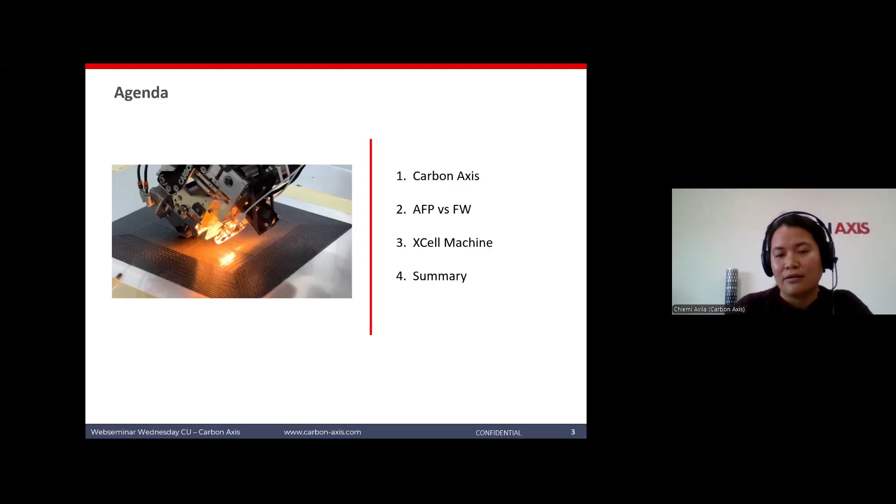So starting with the first section, who we are. Carbon Axis was founded in 2018 in La Rochelle, France. We are located on the west coast side of France. It's a very, very nice town in France, next to the sea.

It was founded by Pavel Perrotet and me. So we specialize in automating composite processes. The vision from the start for Carbon Axis since the beginning has been to make composite parts more affordable, more repeatable, and generate less waste through simpler and more efficient automated solutions.

So at Carbon Axis, we provide both hardware and software turnkey solutions that are ready for production. They're intuitive, easy to use, easy to maintain, and at the same time, they're affordable and robust.

So our machines are fully developed and assembled in-house in La Rochelle. We are mainly machine suppliers, so we supply machines to different customers in different industries.

We have material suppliers using our machines. We have machines in the aerospace industry, in different general industries, and also in universities.

And we also provide R&D services. So we have in-house facilities, two machines at our facilities that can be used to do R&D testing. We can do material validation, simulations, and prototyping.

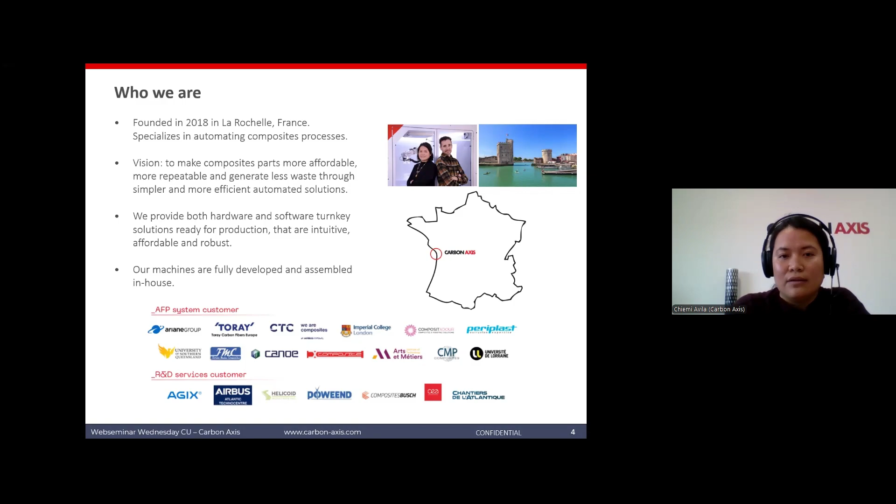And then we have customers that want to go sometimes into small series production. For that, some of our customers have now become partners as well, having our machines to be able to do serial production if necessary. So that's who we are at Carbon Axis.

Now we're going to go into the second section, the difference between fiber placement and filament winding, and how we can work with both of these processes together.

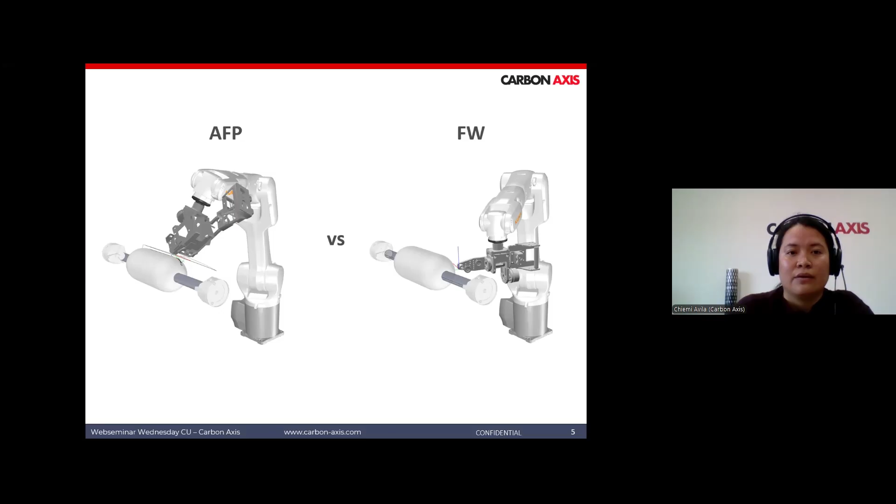As an introduction, I'm just going to introduce the term for tape winding. Tape winding is the process of using an automated fiber placement head, like we can see in the video, with an external axis, which in this case can be horizontal or vertical.

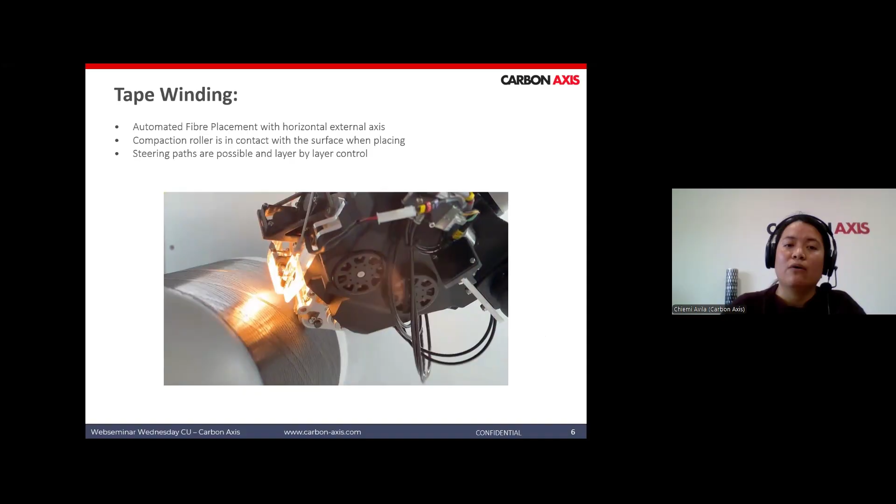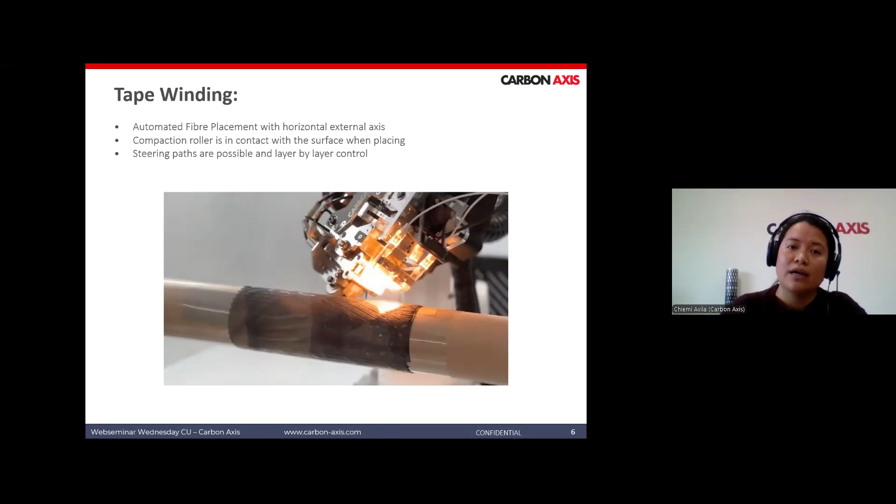The main difference when comparing fiber placement with filament winding is that with fiber placement, we are always in contact with the surface when placing. The fiber being placed has some pressure applied by a compaction roller. In filament winding, you are not in contact directly with the surface when placing, since you're placing onto a rotating mandrel under tension.

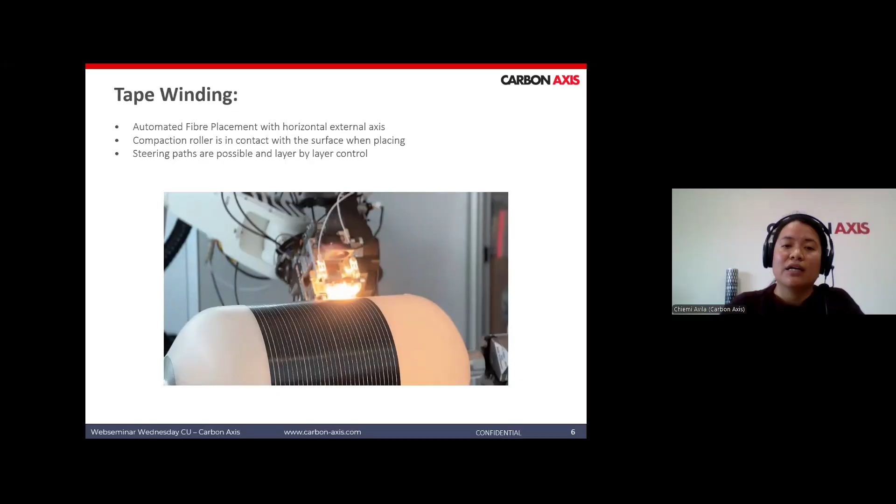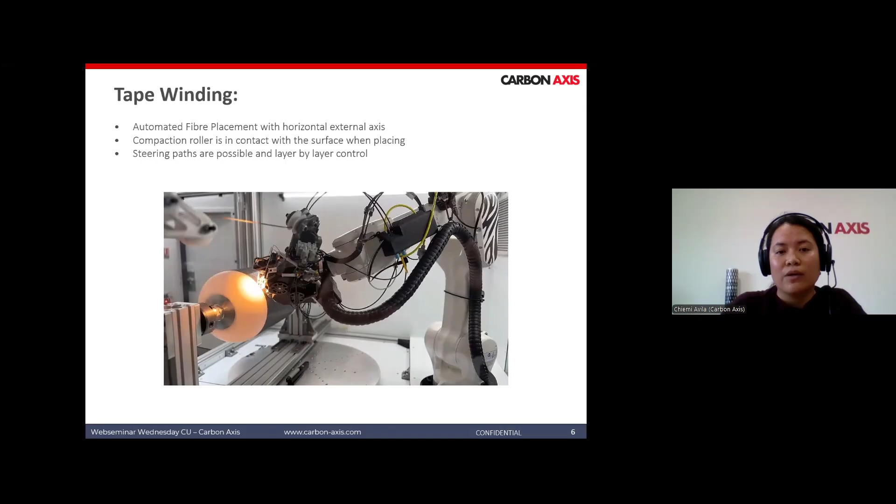The advantage of being in contact with the surface, as with tape winding, is that we have more control over what we're placing. We have more precision on the tow being placed, giving us layer by layer control.

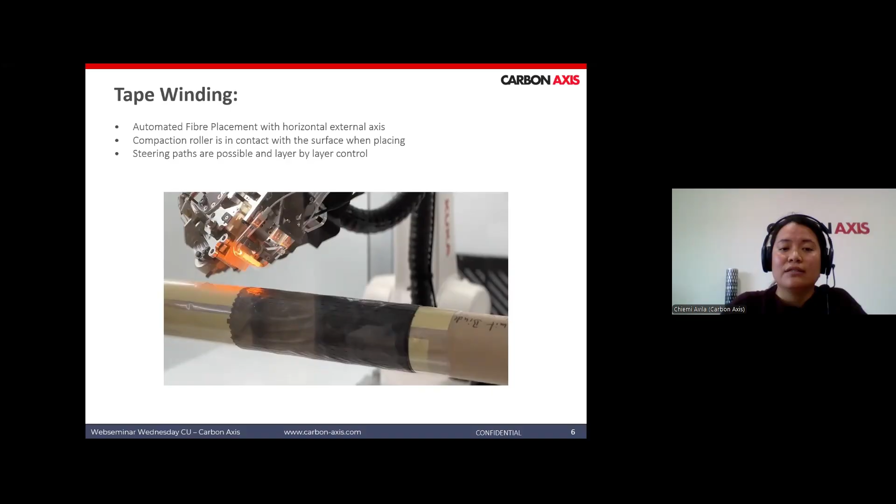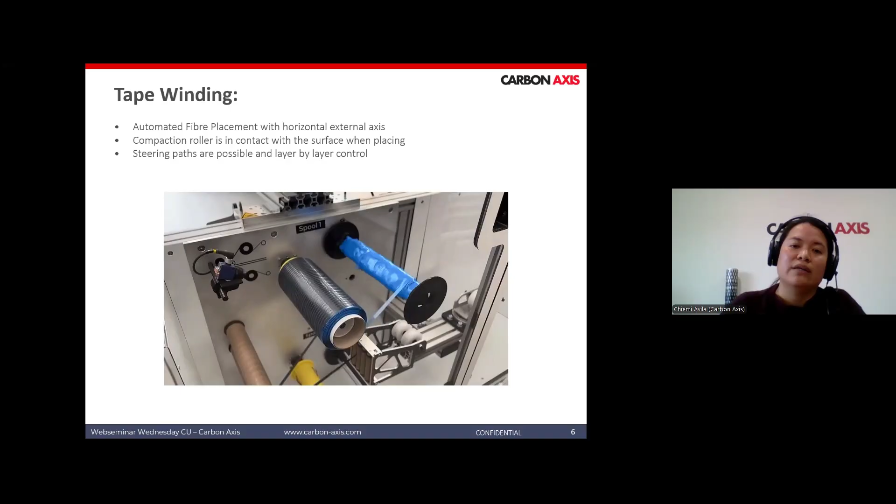Another advantage is that we can use steering paths, so we can have paths that follow the load, allowing you to optimize your layout better. So one of the advantages of tape winding is more precise control whenever we're placing the fiber, in comparison to filament winding.

Another difference between tape winding and filament winding is the fiber angle. In tape winding, we're able to place any angle that's available—we can place pure zeros, as you can see in the picture, or pure 90s.

In comparison, filament winding has a challenge achieving angles lower than 15 degrees, like angles parallel to the axis. These shallow angles are very hard to place with filament winding. In tape winding, you're able to place any angle, though there are restrictions depending on the head—you might have some collisions with the mandrel—but in general, any fiber angle can be placed with tape winding.

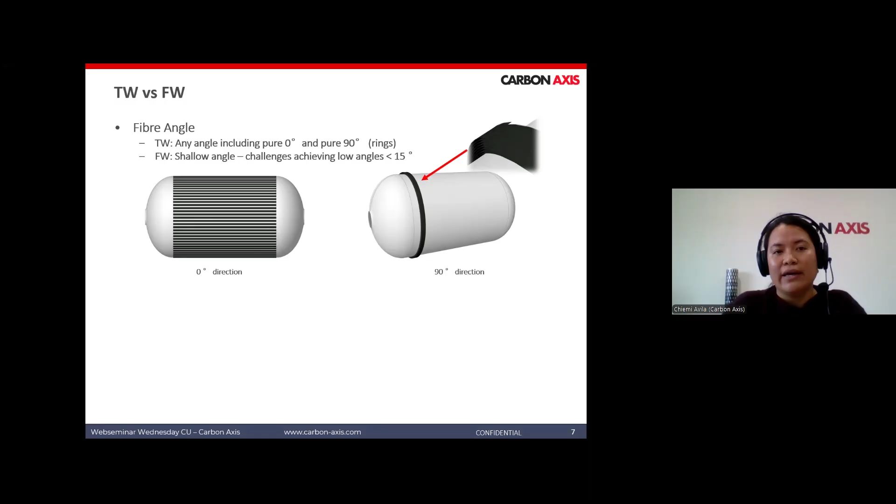The main advantage of tape winding is the idea of using local reinforcement. This isn't possible in filament winding because you're continuously placing fiber, but in tape winding, we are placing and cutting each fiber, which makes it possible to place material locally.

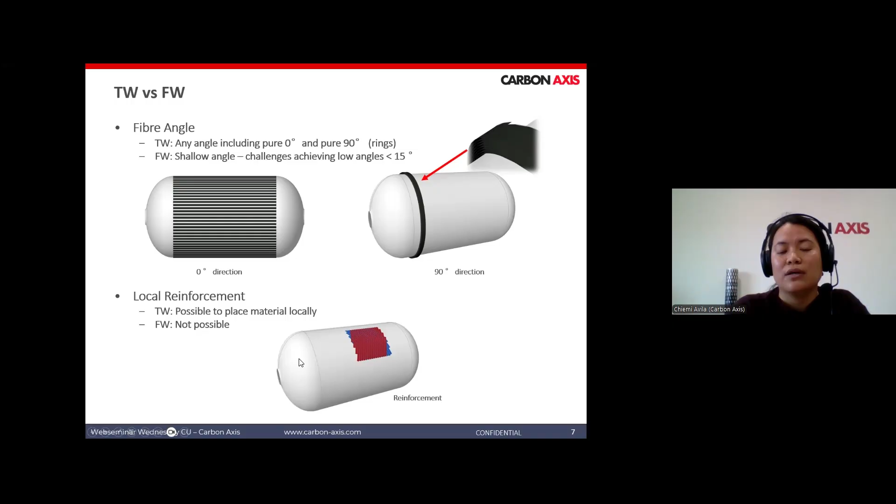In this case, we just did examples, like for example a patch to reinforce maybe some inserts. You can also reinforce some domes. The whole idea is that you can only place material where it is necessary.

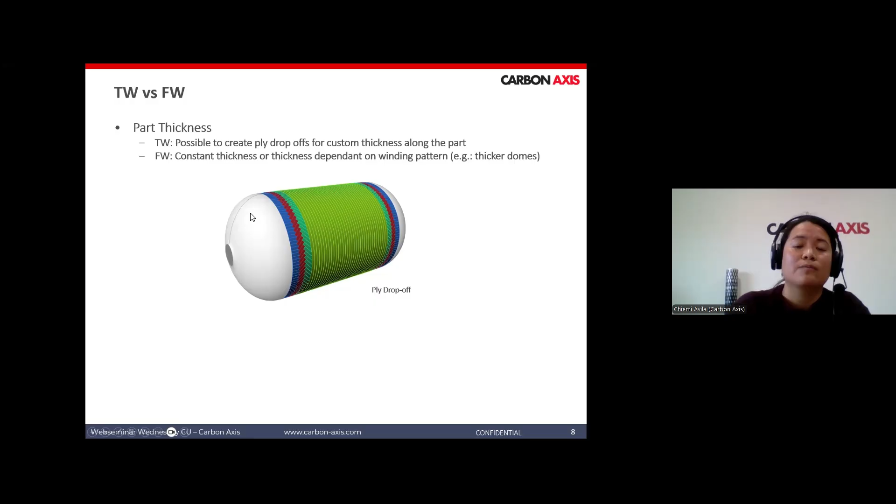Like that, in tape winding, you are able to have custom thickness. This is something not possible in filament winding, where you have constant thickness that's also dependent on the winding pattern you have. For example, in pressure vessels, you usually have very thick domes because of the turnover regions where the fiber keeps building up.

But in tape winding, you're able to create your own ply thickness. You have reduced part thickness, so you can also use less material, and you're able to create, for example, ply drop-offs. Like in this example, we have four different layers, as you can see here, and like that, we're able to select material just where it's necessary.

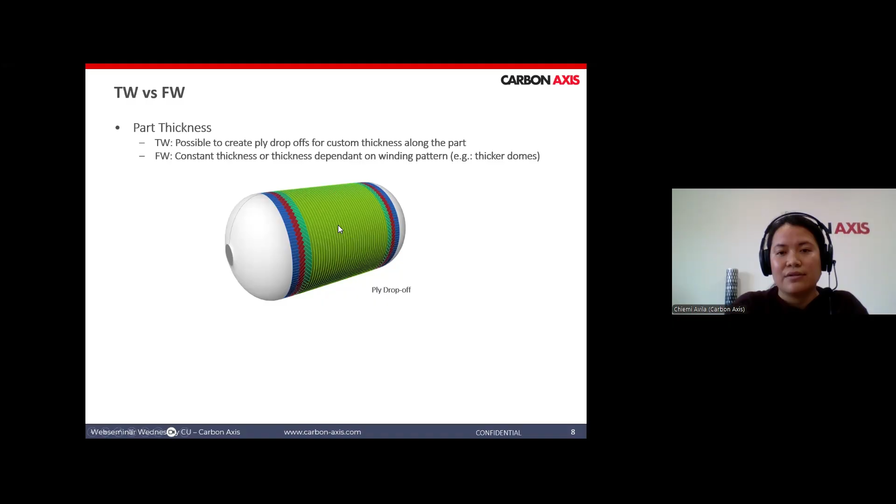Because we're able to place locally, we have lower material waste with fiber placement. This is because we don't have the turnover zones at the extremities. For example, in filament winding, when winding a pipe, you have very long turnover zones if you want to wind shallow angles at the extremities. So the advantage of tape winding is that you can reduce the thickness and also reduce the material you're going to use.

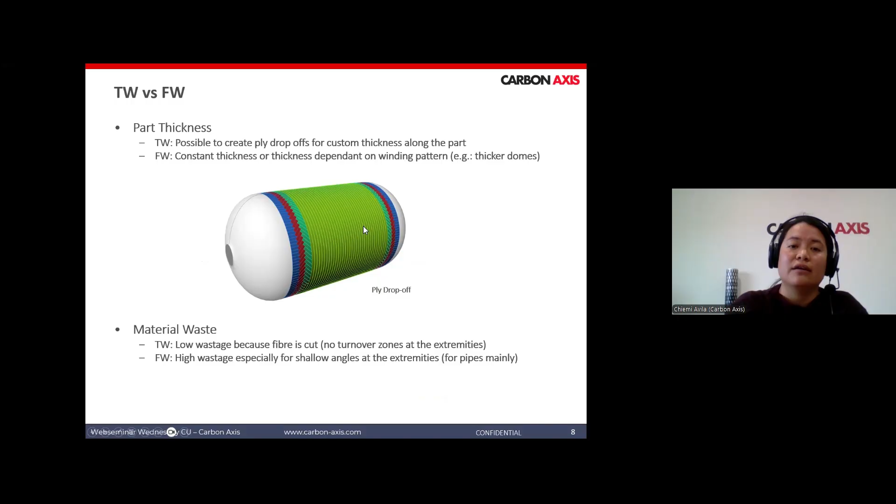As we saw in this picture, we're placing each layer as a unidirectional layer. That affects the part quality that we get from using tape winding. In tape winding, the part quality is higher because we don't have the crimp between the layers that is formed like when we're using filament winding.

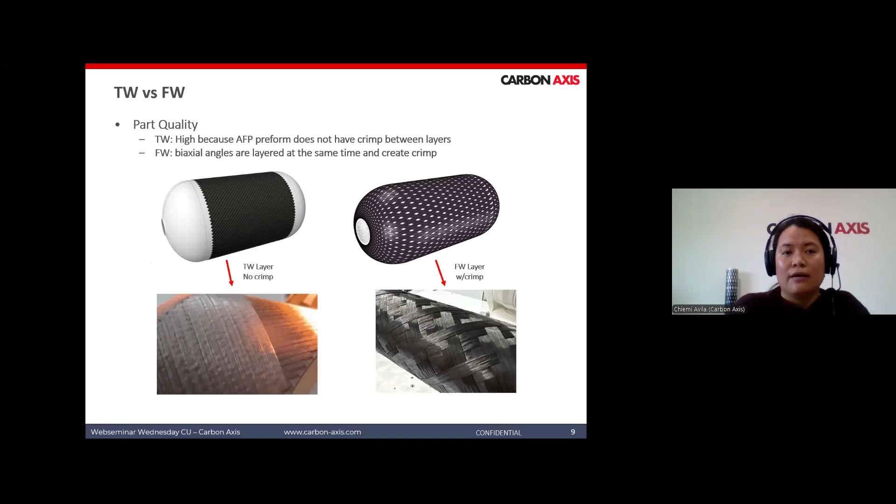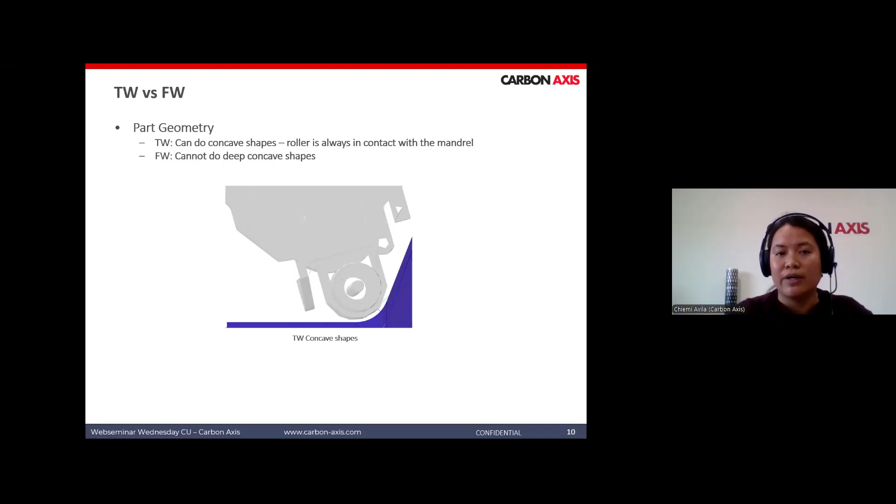So the part quality in tape winding is better. Another advantage we have when using tape winding is the part geometry that we can place. We are able to place more complex parts, we can do concave shapes, for example. As our roller is always in contact with the mandrel, we're able to place directly on the surface and do not have the fiber bridging that we will have with filament winding. So in tape winding, we can do more complex parts, concave shapes, double curvatures, non-symmetrical parts that you cannot do with filament winding.

However, one of the main disadvantages that we have with tape winding is the deposition rate. It's a much slower process compared to filament winding. So it's not that you can just say, okay, I just want to replace my filament wound part now with tape winding to have a more optimal part, because the production cycles are not going to be the same.

So the whole idea is not to replace one process with another, it's to combine both processes. In this case, you can do filament winding, for example, to do the bulk structure, and then use fiber placement to do the local reinforcement.

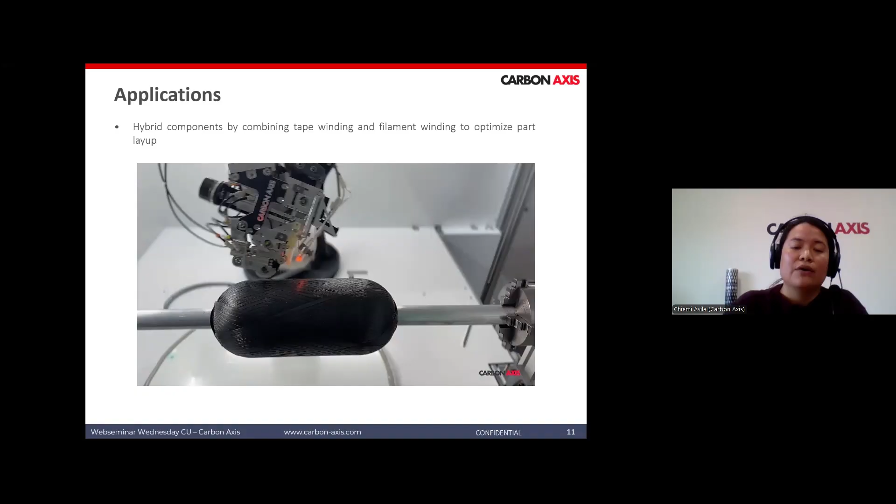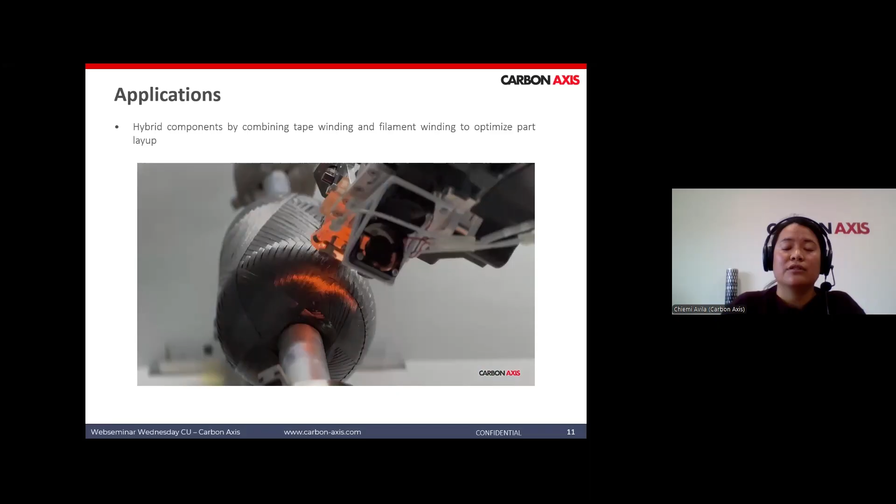Some applications we have been looking at are pressure vessels, to do dome reinforcements with fiber placement, and then do the hoop with filament winding. So we have options like for pressure vessels, dome reinforcement, also for inserts, reinforced locally. We have also some parts that, if they are loaded in tension, will need some zero directions. So this is quite interesting, to combine filament winding and fiber placement.

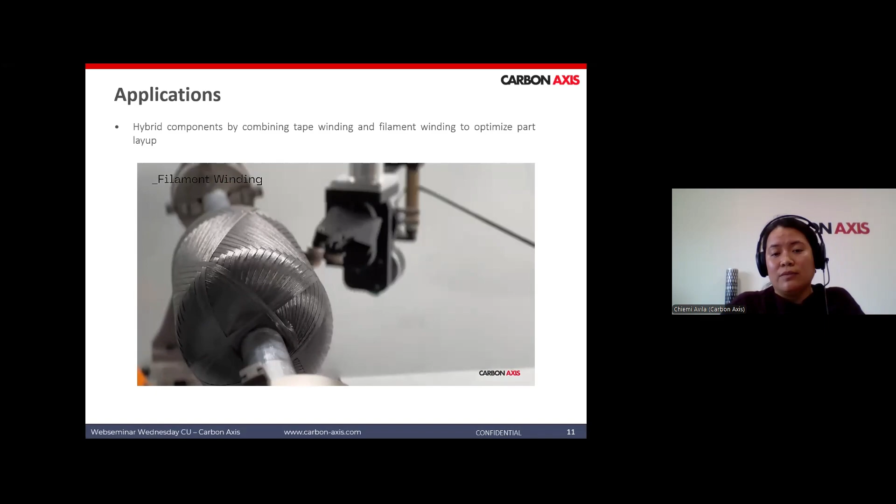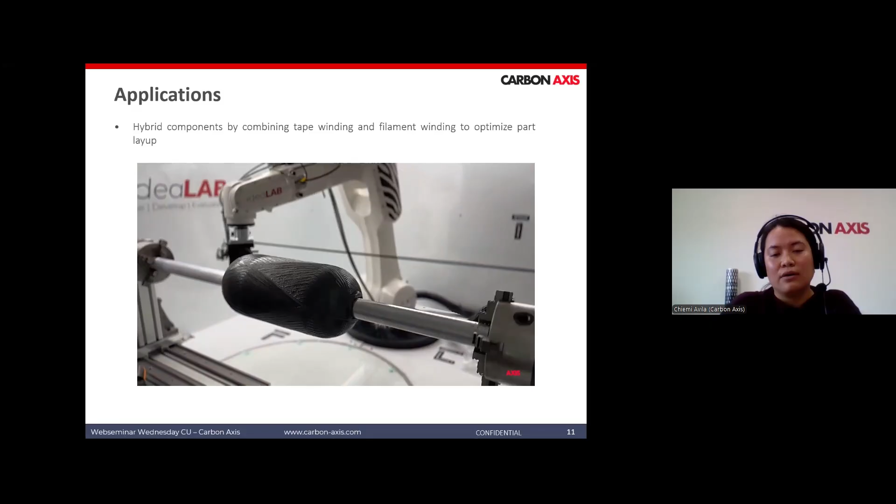We have also been looking at reinforcing connections between parts with fiber placement. Usually the high deposition rate is done with filament winding, and then you just do some fiber placement to do local reinforcement, to optimize and improve the mechanical properties of the final part.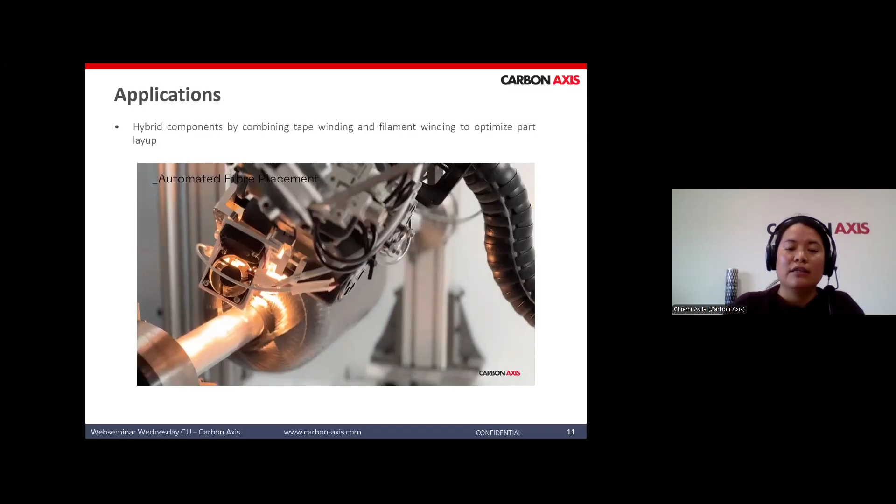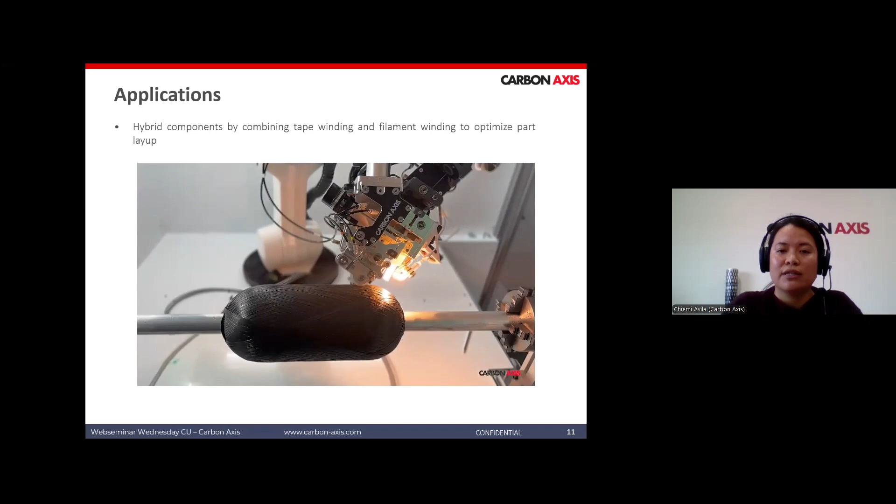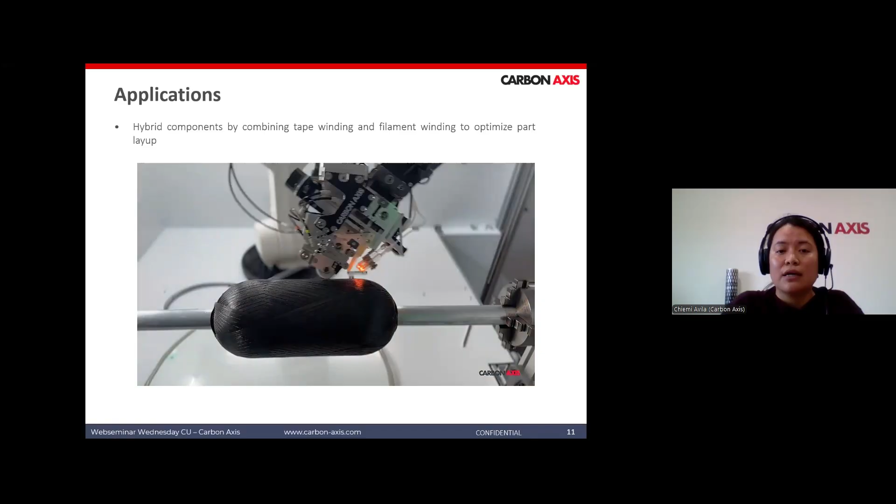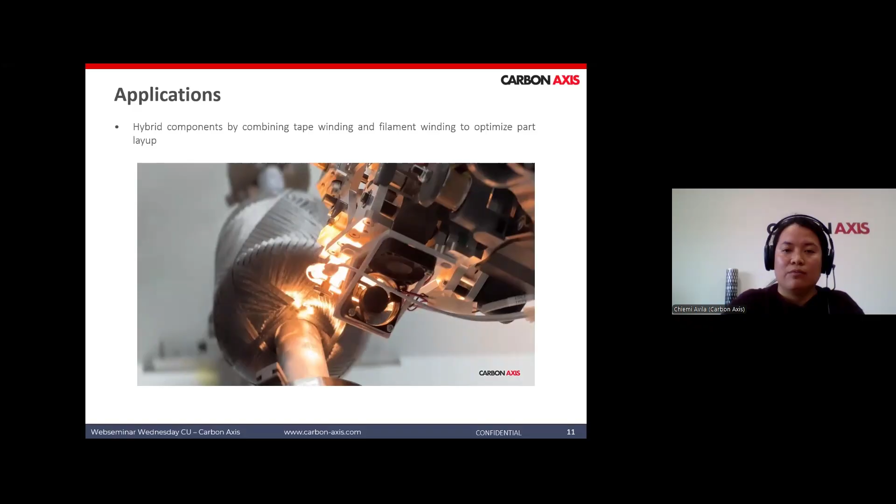In this video that I'm showing you, we were doing filament winding at the beginning, and now this is just for a demo, a prototype just to demonstrate the technology. Now we're doing some zero directions to show that we can do zeros inside. But the interesting part of this video is that we are using the same material. So we are winding and doing filament winding and AFP with the same material, a Toray towpreg, and in the same machine. So it's the proof of concept that we wanted to show.

Nowadays, the problem is that if we want to combine both processes, you need different machines. You need a machine for filament winding, and then you need a machine for fiber placement. Sometimes these machines come from different suppliers, which means you have different integration costs. There's also more workspace floor needed because there are two different machines, and you can have more workforce, so two operators, one per machine most probably. And then you also have higher maintenance costs and integration costs. Everything keeps adding up.

One of the problems as well is that it's not so easy to combine both processes, so it takes longer time to production, as you have to do machine settings per machine, per process, and that can have differences and also affect the final part.

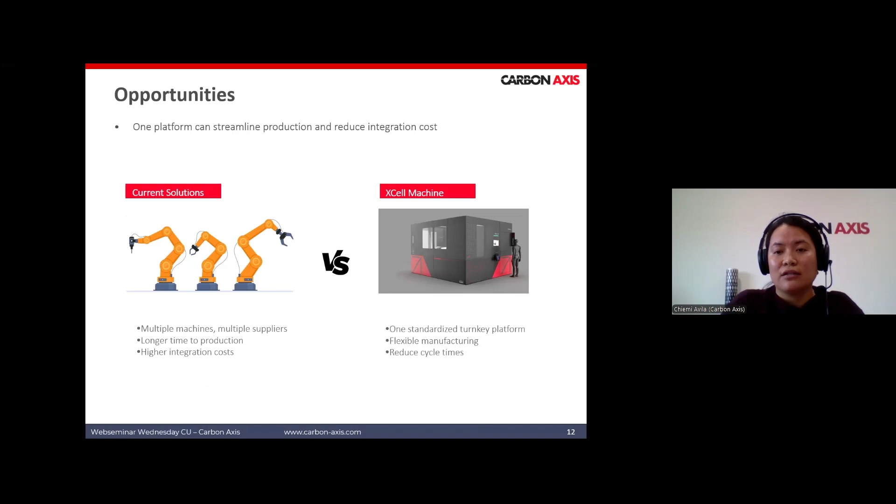For this, at Carbon Axis, we have developed the XCell machine, what we call a one standardized turnkey platform. The whole idea is to have both processes inside the same machine, so we are able to have flexible manufacturing. You don't have to change the part from machine to machine; you always have the same part, and the only thing you need to change is the tool, the end effector, that is going to be doing the different process. Like that, we're able to streamline production. We are able to reduce integration costs and maintenance costs, and at the same time reduce the cycle times for the parts.

So I'm talking about the XCell machine. The solution that we have developed is a compact and accessible multi-process solution.

A bit of background on Carbon Axis: we started in 2018, mainly as an automated fiber placement solution provider. So the XCell was initially developed only to do fiber placement, only to do AFP.

Something we saw is that our clients were being restricted with the kind of parts they could do. We were looking into how we could make it more flexible, how we could add more value to the machine for the final customer. So we looked into having a modular machine that could integrate different processes, leaving the choice to the final customer to decide how flexible the machine needs to be.

We already had an enclosed machine with a robot, so we could use this robot to do different processes at the same time. That's how we decided to integrate different processes as standardized modules.

All these processes are standard optional features for us, and they can be integrated at any time. This is important because the machine has, since the beginning, been prepared to take all these different modules. So even if you don't take, for example, filament winding at the beginning, if you want to add it later, it won't cause a lot of integration work because the machine has already been prepared for that module.

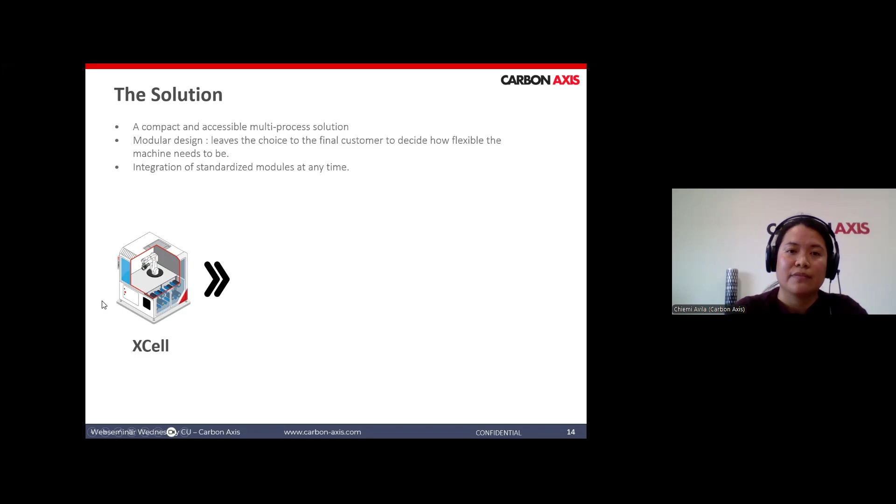This was something we wanted for the client, to be able to reduce integration cost and the investment they would need to make. So we developed the XCell, as we can see here, and the different modules that we have now are the following.

We added an automatic tool changer, which is quite important because now we have different processes, and each process has a different end effector. In order to change fast between them, we needed an automatic tool changer. That is the base for the modular modules that we have.

As I explained before, the XCell started as an AFP machine, mainly to do flat and 3D parts. Then we added the horizontal axis, which we can see in the picture here, to be able to do tape winding. When we were looking at tape winding this year, we also launched our filament winding.

We developed a small head that is now available - it's a single-tow head for this XCell machine and can have a tension per tow of up to 40 newtons. We're using the same horizontal external axis that we developed for tape winding, just adding a new head to enable the new process. So now we have tape winding and filament winding.

We also have the option for ultrasonic cutting. This is quite important for customers who want net shape preforms - they want the preforms already ready to be used for closed mold production.

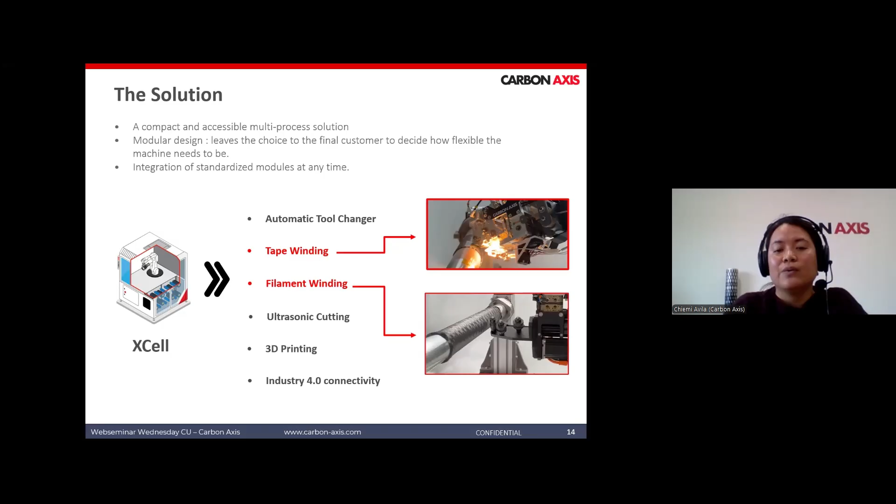Finally, we have Industry 4.0 connectivity. This is quite important nowadays to have a machine that can collect data. We have an OPC UA server that enables the user to collect data from the machine while it's doing the process. For example, we're able to collect robot speed, robot positions, and during AFP, the pressure being applied and the heat power being applied.

For filament winding, we're able to check the tension. This is important to know what is happening in the process. You can also use this data and analyze it to create a digital twin. And for production, it's good to have a production log of how the part was manufactured.

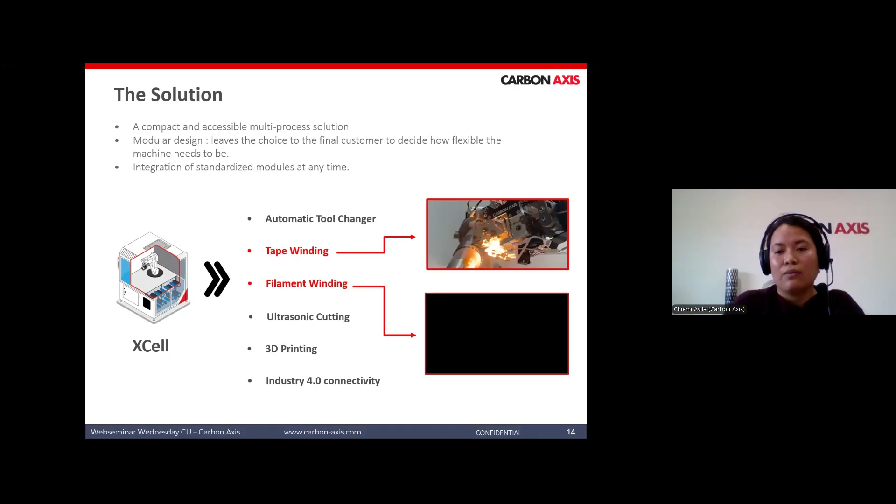The XCell is a standard turnkey solution, a machine that comes with both machine and software. Something we've worked a lot on with this machine is having a balance between custom and standard machines, so we developed one machine and now have different sizes. All the standard modules and process we saw in the previous slides are available across the different machines we offer.

The first machine we developed is the XCell. It's about 2 meters by 2 meters and is an enclosed machine because we have a temperature regulated environment inside. We have a small KUKA robot inside, and on the side here we have a creel system, which enables us to use any standard spool.

This machine was mainly developed for manufacturing small parts. With AFP, we can manufacture parts about 1 meter by half a meter by half a meter, and with winding, parts about 700 millimeters in length and 50 centimeters in diameter. It's very good for manufacturing small parts, for R&D environments since you can work close to the machine, and for material testing or validation prototyping.

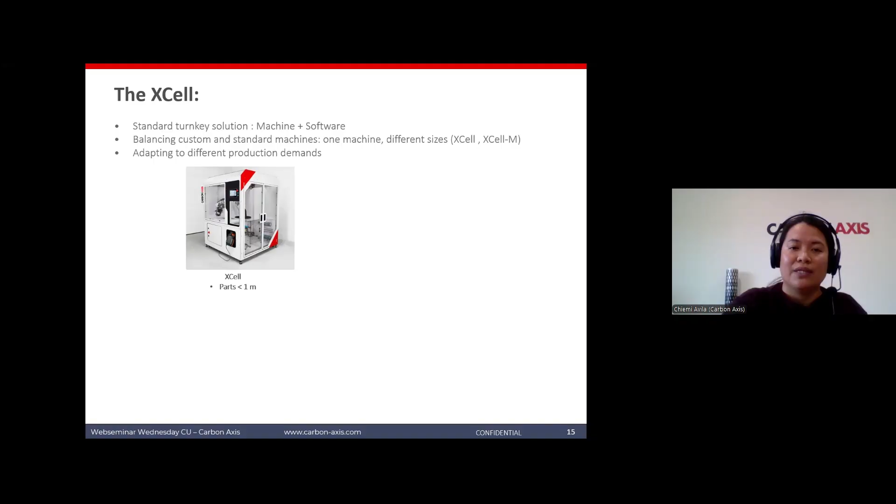However, looking into production, we saw there's a need for bigger composite parts. So this year we launched the XCell-M, a machine that can do parts bigger than 1 meter. Unlike the XCell here on my left, which has a standard size, the XCell-M can be custom.

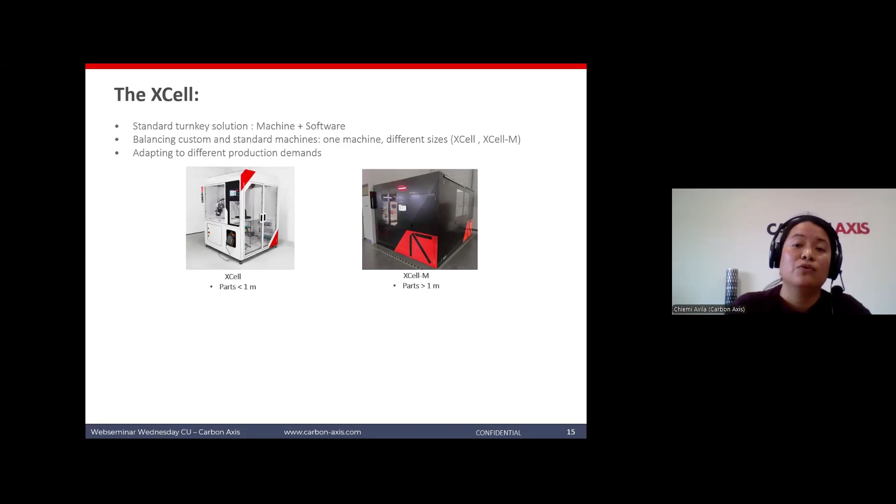We can customize it from the different component catalogs we have, adjusting the length and layout of the machine to adapt to different production demands. The whole idea is that we have custom machines, but always using our standard modules or ready available components. This particular machine we have in our facilities is about 4 by 3 meters and can do parts up to 2 meters in length.

For example, we have a customer mainly doing AFP for parts about 1.5 to 2 meters in length, so we developed a machine for them about 3 meters by 3 meters, sized so it's able to place on those parts.

On this side, we have a customer that wants to do parts of 5 meters length. In this case, we need to mount the robot on a linear axis to achieve those lengths. This machine can do flat layup as well as winding. So for the XCell-M, whenever we go beyond 1 meter parts, we can adapt depending on the production demands of the machine.

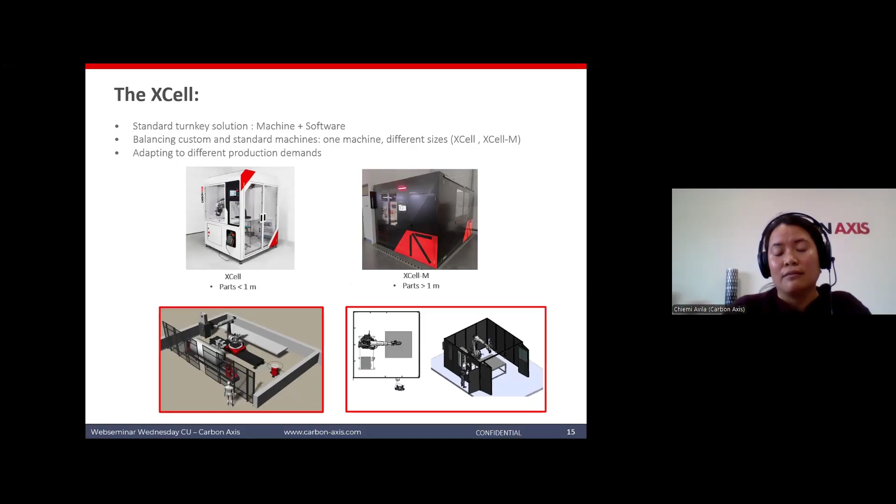So we can have a custom layout while still using all our standard modules. Because we're building a modular machine, our end effectors and tools also have to be modular, so the solution can scale.

This is the AFP head we developed for the small machine, but it can also be mounted on the big robot. With this head, which we call the X-Place head, you can use different materials - we're able to process thermosets, thermoplastics, and also dry fiber materials. And with the same head you can do different widths, from 1 millimeter up to 1 inch.

Something we saw with some fiber placement heads available in the market is that sometimes they are constrained by the type of material you can use, including the type of spool packaging you have. For us, we didn't want clients to be stuck with only one type of packaging, or to have to respool on their side, because that also takes a longer time. So we're able to take on any spool packaging.

We are able to take the 3-inch spool, the classic ones with different lengths, and the Hafner spools as well in different diameters, as you can see in this picture. In this one, the diameter is about 600 mm.

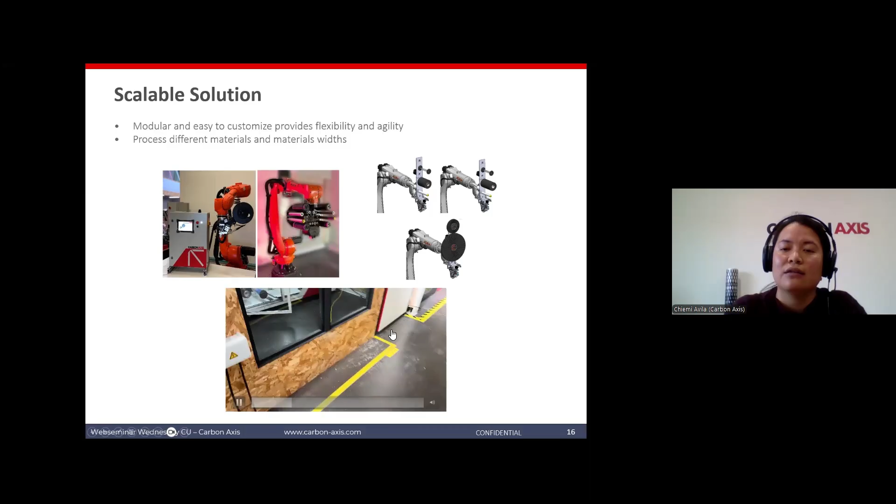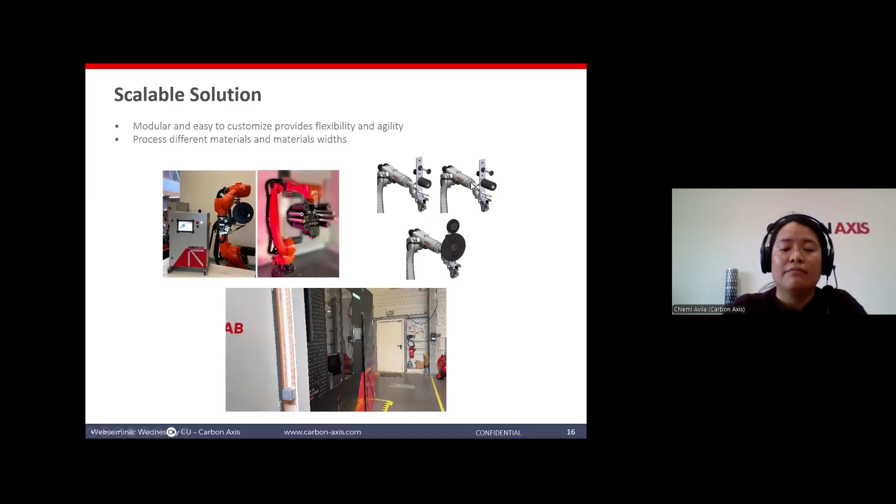Just to show you a quick video of how the machine adapts to what you need: here we were using thermoset fiber placement. We have a machine doing filament winding. And on this one, we have a machine with a different spool setup. So we are able to adapt the machine depending on what the client needs.

As we were talking about, we provide machine and software, and our software needed to be able to have all these different modules inside the same software. So we developed an all-in-one software solution called XLay. It's a plugin we developed for Rhino 7, so we have one single interface for all the different modules we have.

XLay is a very simple and intuitive interface. You can do everything within the same interface: design your part in Rhinoceros or import it, then build your layup. It's a very easy, real-time software that shows you exactly what you are building at the same time, and you can change different parameters.

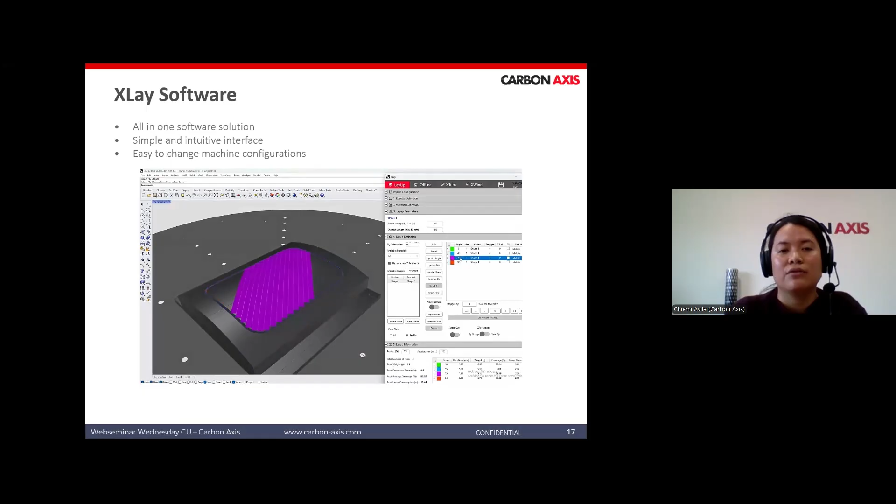The whole idea is you build your layup, then do your offline programming. In your offline programming, you only have to define your machine settings and some parameters, like speeds you want to change.

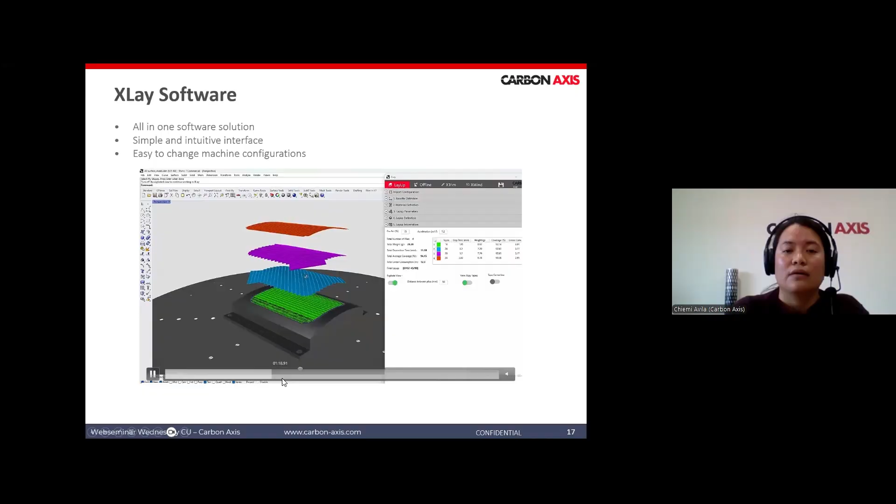Then, offline, you do your machine settings, then you can do your robot simulation to check that everything is working well. Once you start the robot simulation, your machine code is generated at the same time, so you have everything in one single interface.

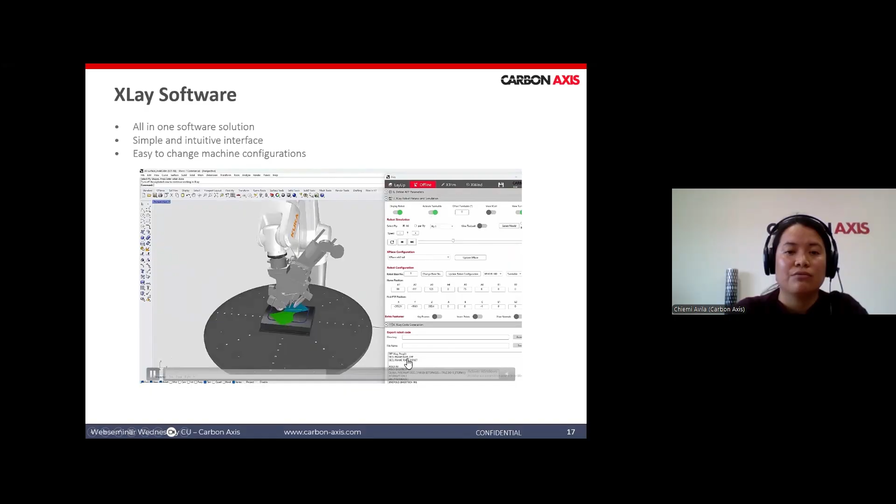The machine is already ready to be run on the XCell machine. You don't need to add or change anything to the code. Depending on, for example, what materials or heat source you're using, everything is updated on the post processor. There's no need to add or change anything on the code.

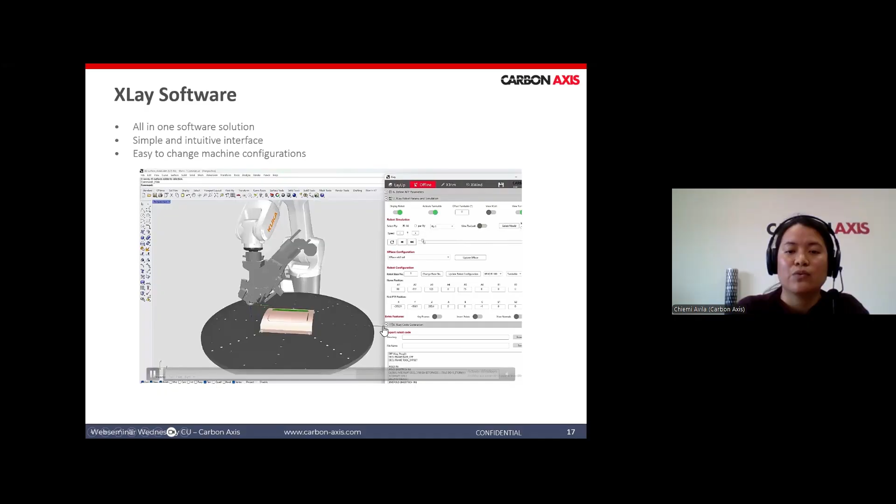We have the same thing for Extreme and X-Wind. Something we also wanted to have flexibility for in XLay is that you are able to change the different machine configurations or different robots you could have. For example, we have some customers that also have the option for the fiber placement head as a standalone version.

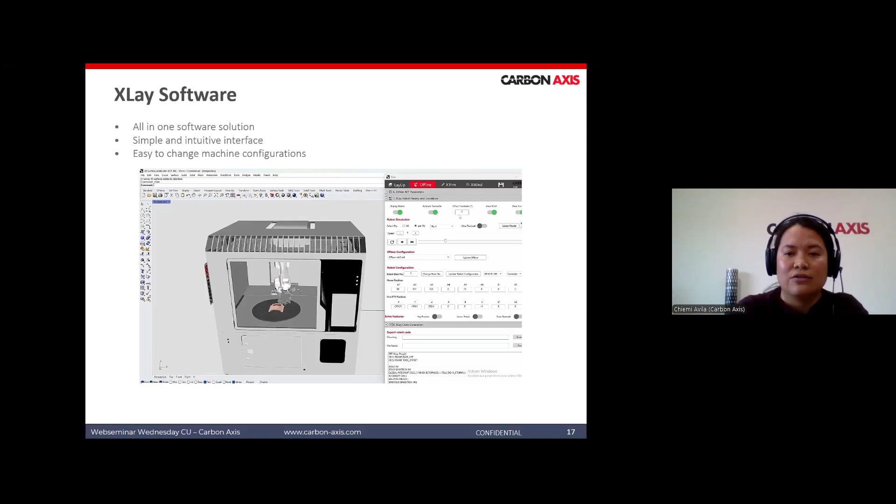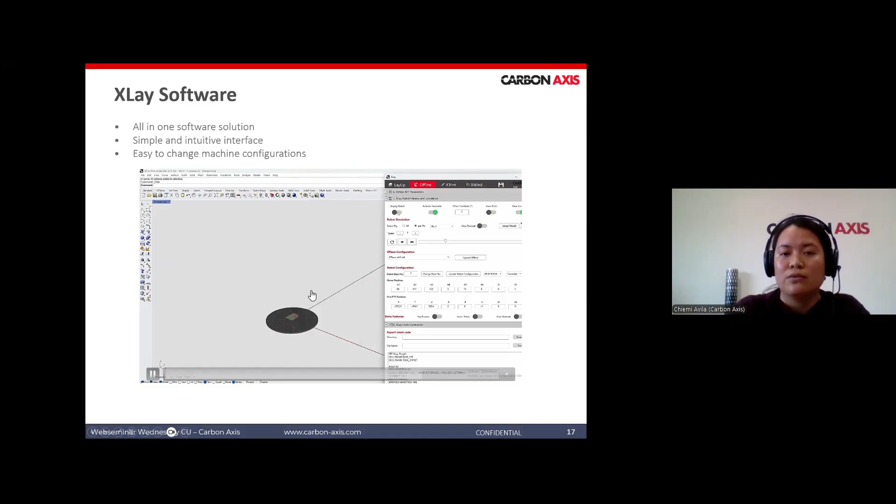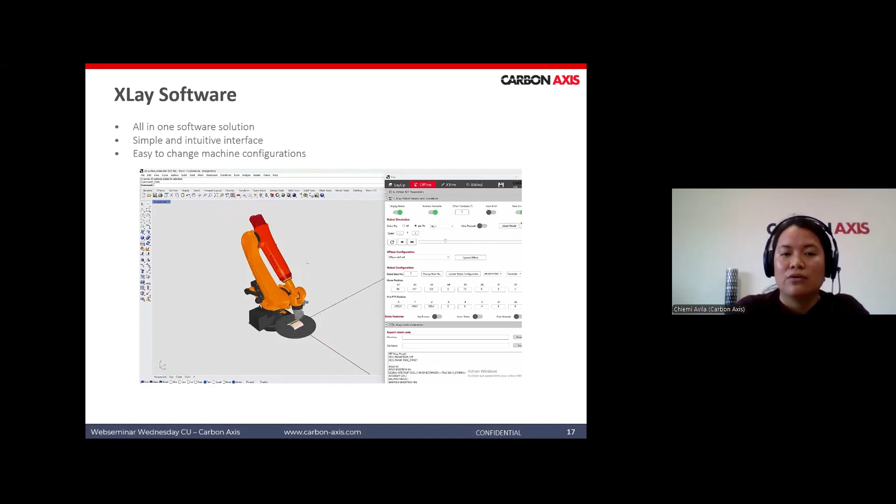Some customers got the standalone version because they already had existing robots, but the issue was they had two different robots and sometimes were mounting the head on each of them. So the idea for us was that they could easily change. For example, they're using a small robot, but then want to use the other robot the next day, so they can easily switch the robot, adapt the base, and it's very simple to do all these machine configurations. You don't have to reset or import any different value.

Finally, we have what we have developed at the moment for filament winding in XLay. We've developed a post processor that works for Cadwind and Composicad files. At the moment, we mainly have the post processor because most of our clients already have filament winding softwares, so they were working with Composicad, Cadwind, and some are working also with CADFil.

The whole idea is the same: you use one interface to import your part, generate your machine code for the XCell machine, and also have the robot simulation. This is quite important because most of these Cadwind and Composicad softwares, unfortunately, don't have the robot simulation.

Which is a bit hard sometimes to know that the part can be properly manufactured, like sometimes there are axes that might have collision with the mandrels depending on the settings used. So the whole idea for us is that you can import your part, see the robot simulation, be sure everything is okay, and then run your part directly on the machine.

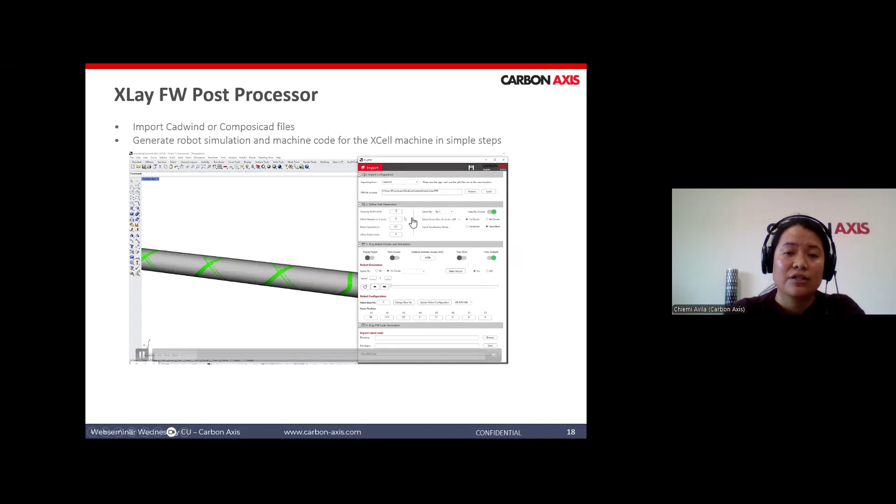So how it works: you just have to load and import your part, you import the mandrel you create. It will show you the circuits that you have per ply. You can change the width of the circuits just to check that everything is the same as you had it in your other software. Then you can check how the mandrel is inside the XCell machine, and then you can start doing your simulation.

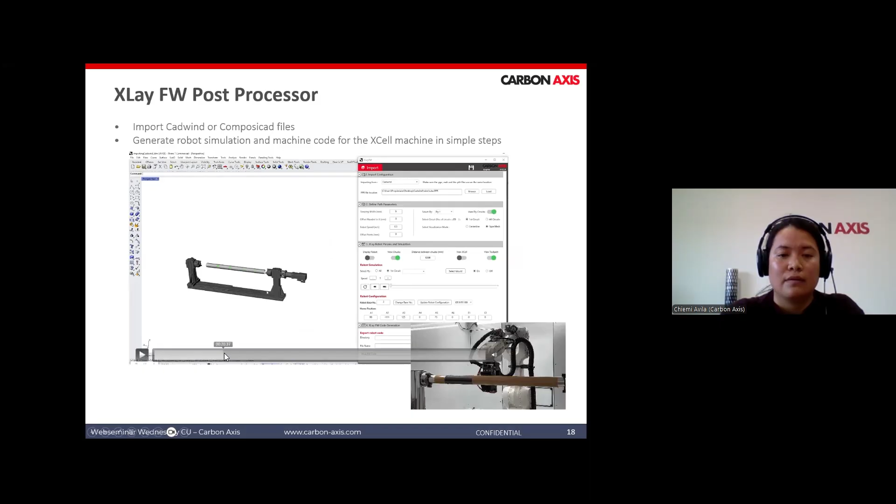Oh, sorry. Okay, we're back. Sorry about that.

So you can see your robot simulation, exactly what the robot is going to be doing for the first circuit, for all your circuits. At the bottom here, you have the code that has been generated, and that's the one being run in this video to show you.

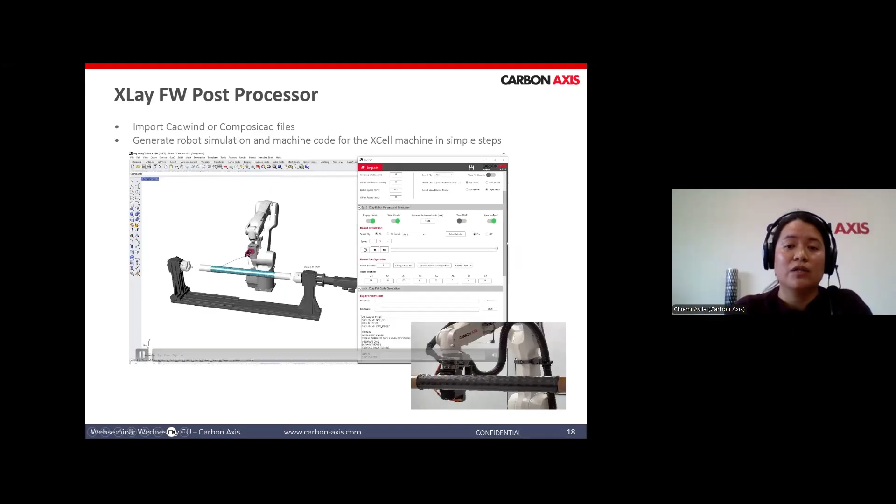What we're doing, like with the post processor, the information that you get in the simulation is the trajectory that the robot is going to be following. So this is quite important, to be able to have the robot simulation and see that there are no collisions.

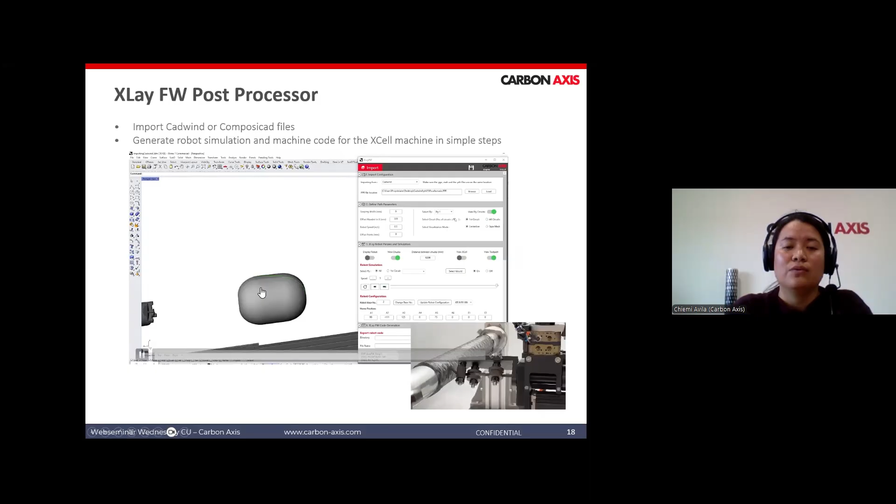In the next example, we're going to be showing, for instance, how you can adapt the mandrel, changing it to the position where it is in the machine, which we will see in the video here. And in this example, we're using a 5-axis setup, using the yaw axis.

So we need to make sure that the head is not colliding with anything here. This is quite hard sometimes in other software, so for us it was important to be able to display that.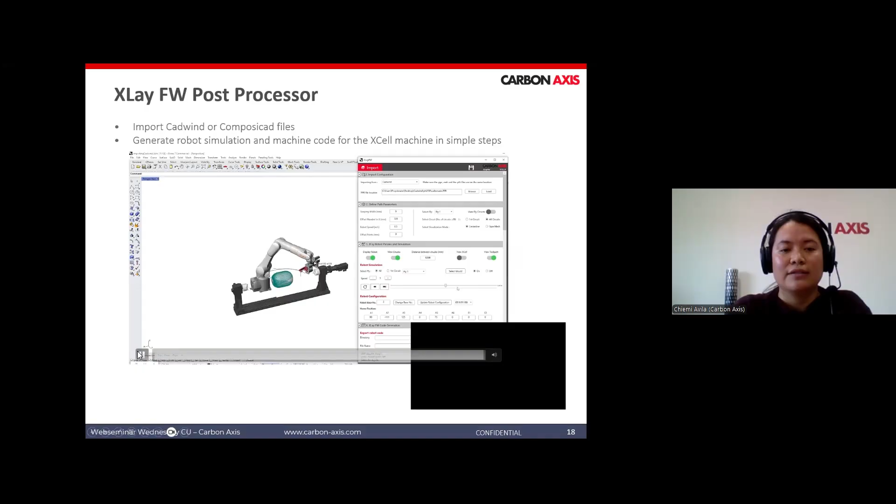And we are also developing a full filament winding software. It's not just a post processor, it will also have the option to do your circuit planning inside the filament winding software.

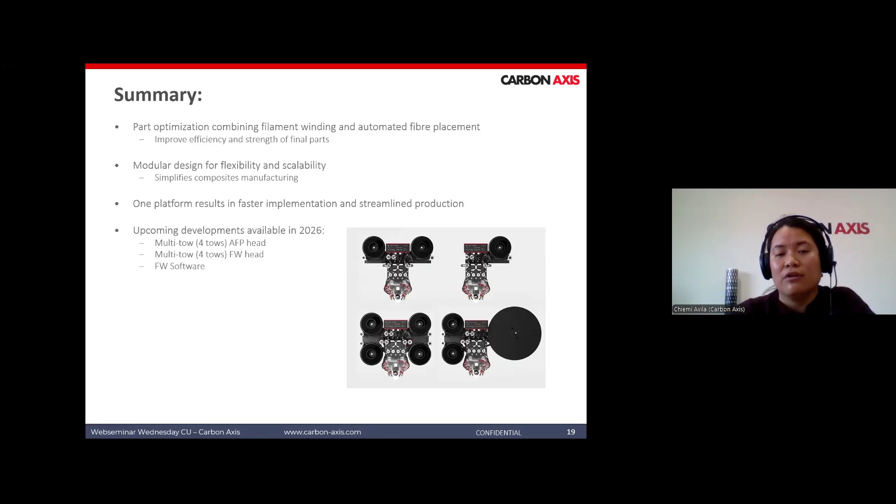Thank you. Thank you very much, Chiemi. It was a nice and impressive presentation, very fast and a lot of information. It's really what you have developed in the last year, a very impressive technology. I haven't seen this kind of combination before, very, very impressive.